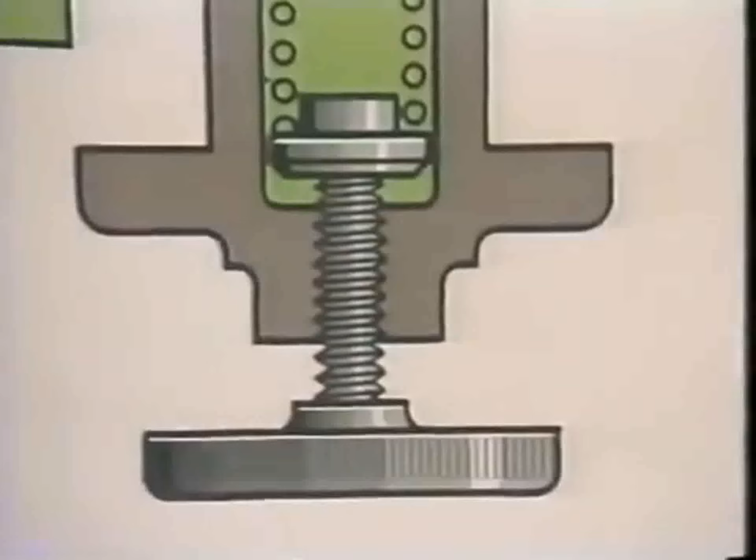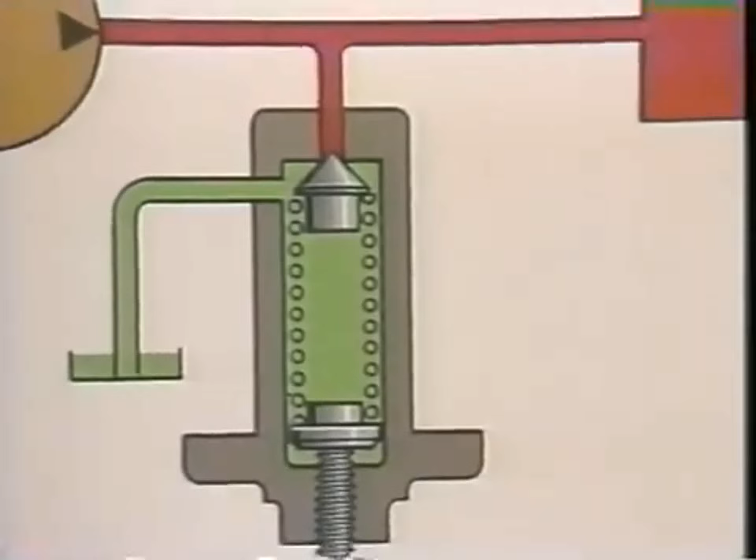Let's start with the relief valve. In its simplest form, it doesn't have to be any more than a ball or poppet held on its seat by a spring. Here we would just tighten up on the spring until it was easier to move the cylinder with its required load than it would be to push the poppet off its seat.

Oil, like all liquids, takes the course of least resistance. If the cylinder is overloaded or stalls, the increase in pressure overcomes the spring load on the poppet. The poppet is then lifted off its seat, permitting the pump delivery to go to tank at a safe level. Pretty simple, you say, and it is.

But let's take a look at that spring. If the area of the poppet seat was only 1/4 of a square inch and we wanted a pressure setting of 1,000 psi, our spring force would have to be 250 pounds. Force equals pressure times area. That means it could support 1/8 of a ton without compressing, and that would have to be a very stiff spring.

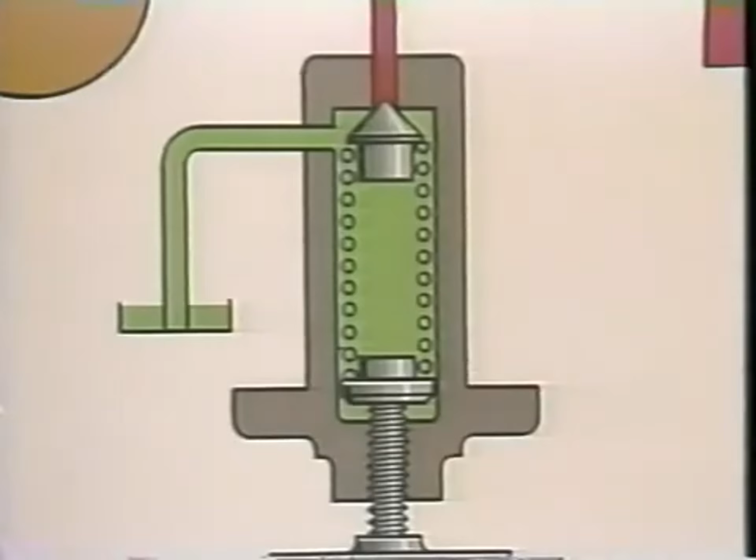Now, let's go back to our circuit and assume we have a 1,000 psi setting on the valve and a gradually increasing load on our cylinder. When the pressure reaches 1,000 psi, nothing happens because the hydraulic force on the poppet is exactly equal to the spring load. Any further increase, no matter how little, unseats the poppet and a very small quantity of oil begins to flow through. This is called the cracking pressure because the valve is not yet open enough to pass the full pump delivery.

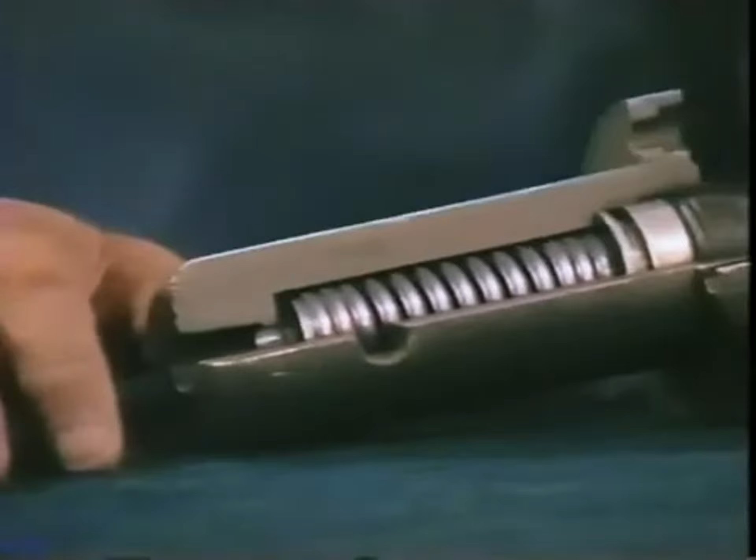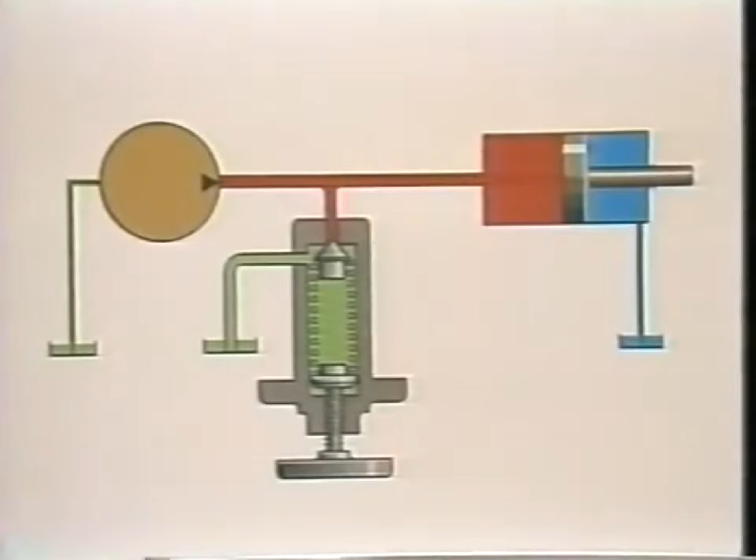The more oil we push through the valve, the wider our opening must become, and of course the more we must compress the heavy spring. And that, in turn, is going to take more pressure. Now, if our pump were a small one, say 1 or 2 gallons per minute, the increase in pressure would probably be negligible—15, maybe 25 psi. A 10-gallon pump at the same spring setting, however, might require an increase of 150 to 200 psi to pass its full delivery through the valve. This difference between the cracking pressure of a relief valve and the pressure at which it can pass the full pump delivery is called override.

A simple relief valve has too much override to be used in most of today's high-pressure circuits. One suggestion might be a larger valve, but then we'd have more area under pressure, and this would require an even heavier spring, so you can't gain that way.

Fortunately, there are better valves for handling large quantities of oil. They have a number of different names. We call ours a balanced piston relief valve for reasons that will become obvious if we look at an illustration.

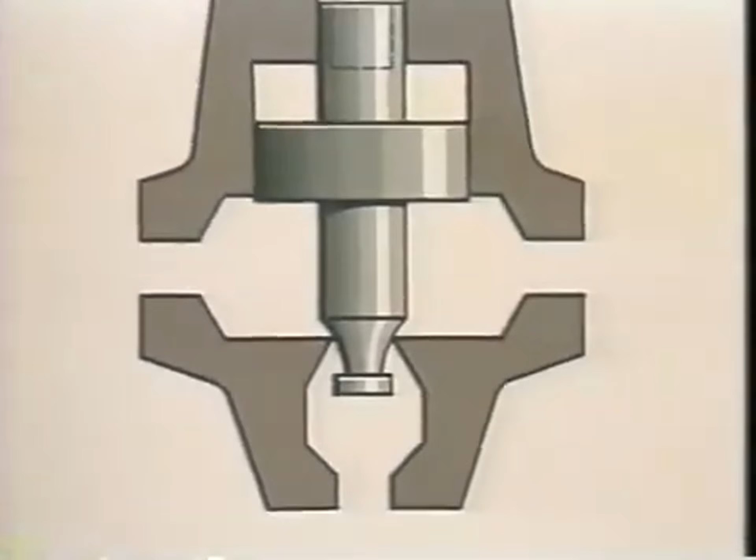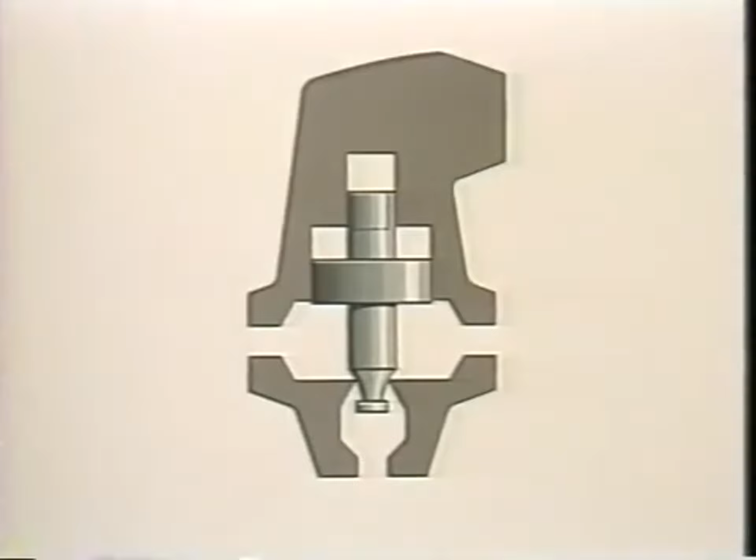We start with a piston which has equal areas on the top and bottom. It fits into a body which has a straight-through passage for convenience in piping and a port at the bottom which must be open to tank. If, for instance, our pump were on the left, oil would flow into the valve around the bottom of the piston and out the other side to the cylinder. Even a light load on the cylinder would cause sufficient pressure on the underside of the piston to lift it off its seat and permit all the oil to go to tank.

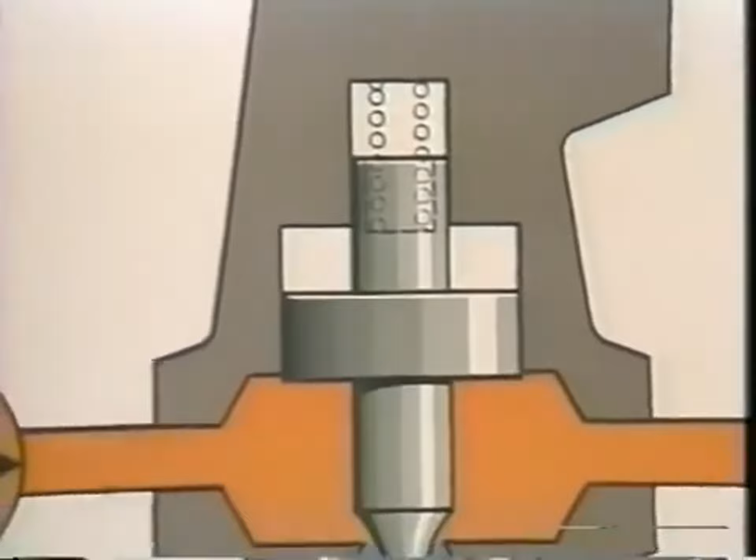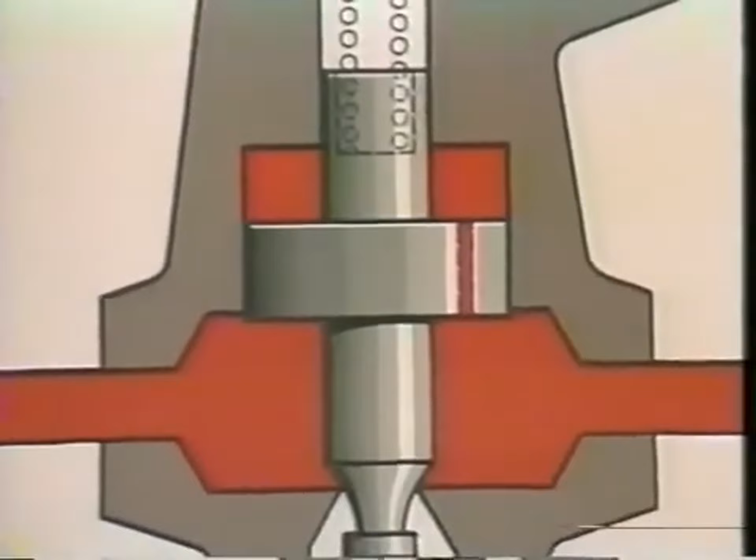To prevent that from happening, we install a spring on top of the piston, not a heavy one as we did before, but one so light that only 20 psi under the piston would cause it to lift. Next, we drill a small hole through the piston, connecting the area on top with the area on the bottom.

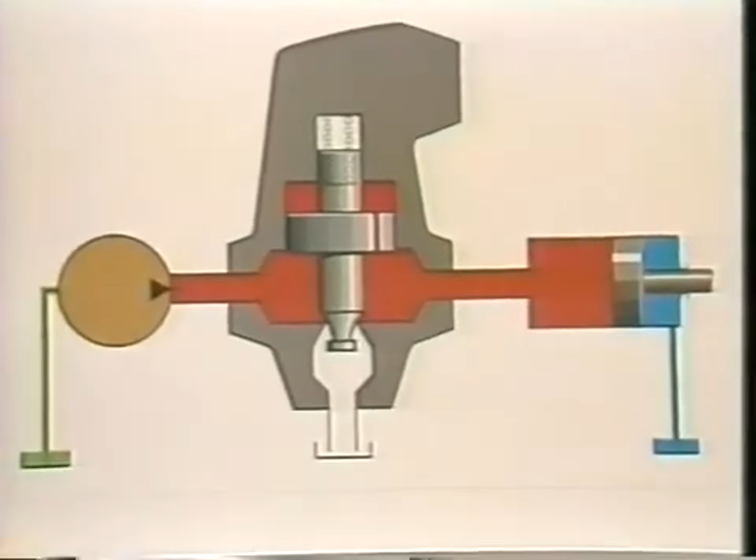Now, any pressure on the underside of the piston would force oil through the little hole into the top chamber until it was filled. Then, of course, the flow would stop.

Let's go back to one of our basic hydraulic principles. To have flow through an orifice, there must be a difference in pressure. If there's no flow, the pressures will equalize. Once our top chamber is filled, the flow stops, and the pressures top and bottom become the same. With equal pressures acting on equal areas, our piston is in hydraulic balance, and the light spring holds it closed.

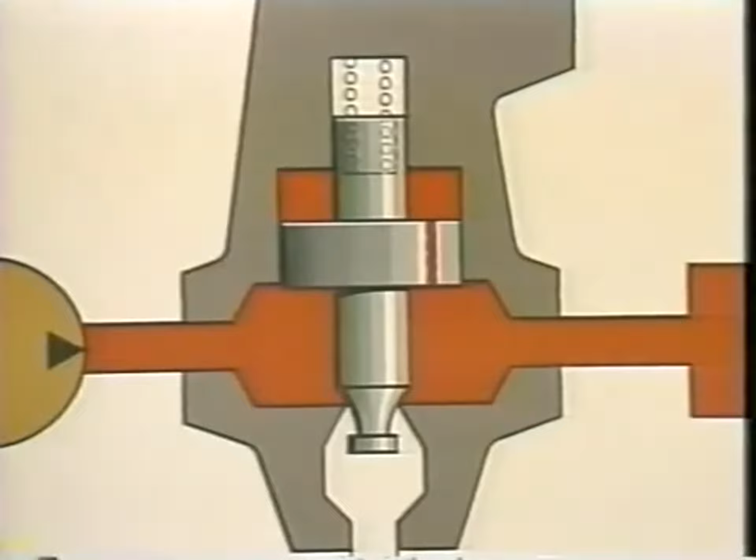What we've done is use a light spring and hydraulic pressure to hold the valve closed, instead of just a heavy spring. The rest is easy. All we have to do now is limit how high the pressure can go in the upper chamber.

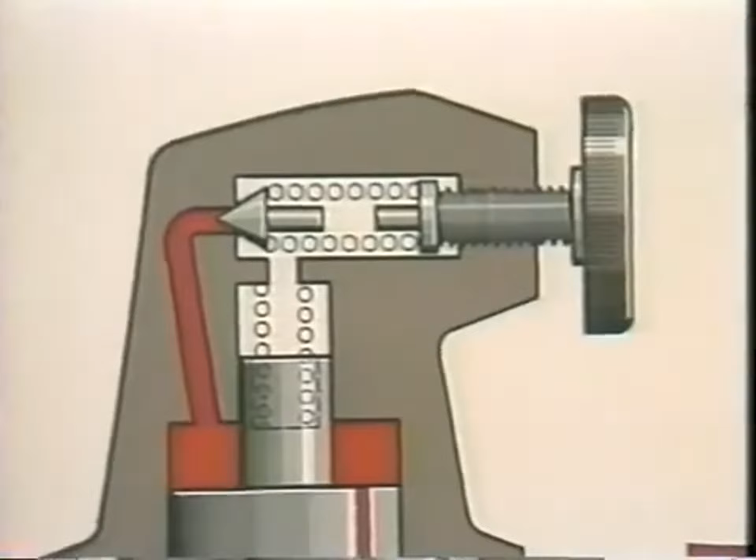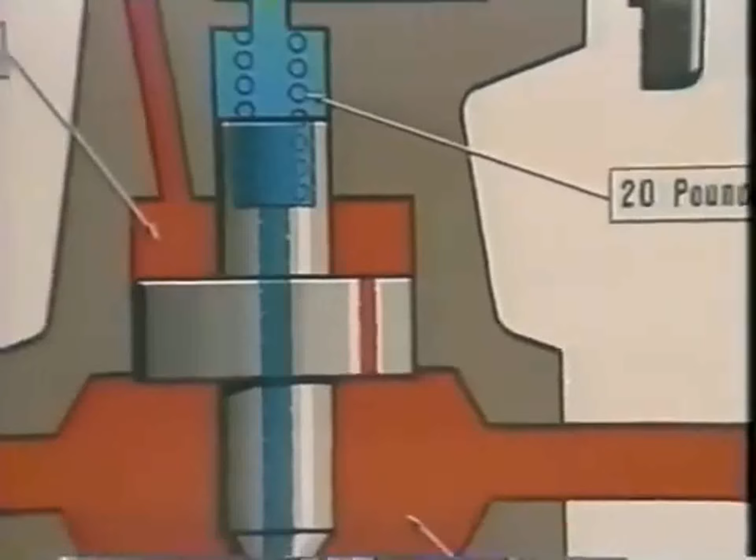To do that, we put a small poppet with an adjustable spring in the top cover and a passage connecting it to the chamber above the piston. If we set the poppet to open at 500 psi, the pressure above the balanced piston will be limited to 500 psi. With 500 psi and our light spring holding it closed, the most pressure we can get in the bottom will be 520 psi.

To increase or decrease the pressure setting, we merely adjust the spring in the cover. Actually, 3 springs are available, giving us maximum pressure settings of 1,000, 2,000, or 3,000 psi.

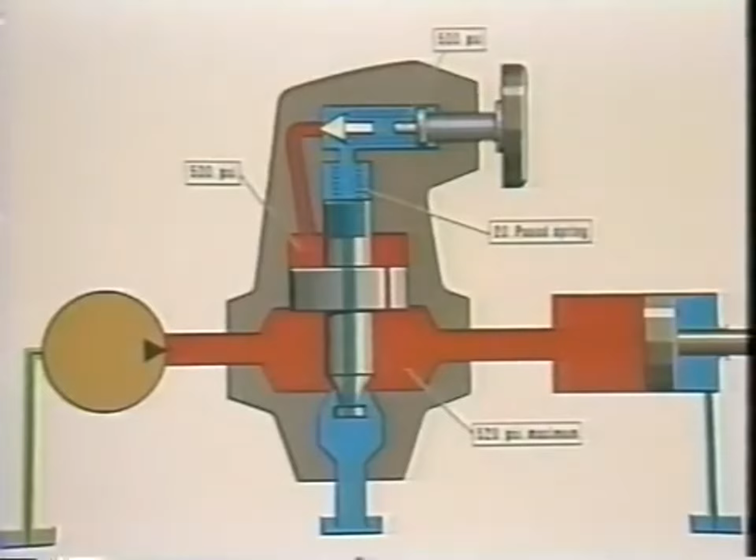You're probably thinking, that's a neat valve, and I can see how it works, but how does it overcome the override problem of the simple relief valve? Well, you're on the right track.

To explain, let's use a 1 gallon per minute pump and set our valve at 1,000 psi. As the load increases, pressure rises until it reaches the setting of the poppet and pushes it off its seat. The oil wants to flow through the poppet and back to tank, but it can't all get through the balance hole. So the pressure beneath the piston continues to rise.

When this pressure increases by 20 psi, it overcomes our light spring and lifts the piston off its seat. That 20 psi difference pushes about half a gallon per minute through the balance hole and over the control poppet in the top cover. The rest of the fluid lifts the large piston off its seat and flows out the tank port.

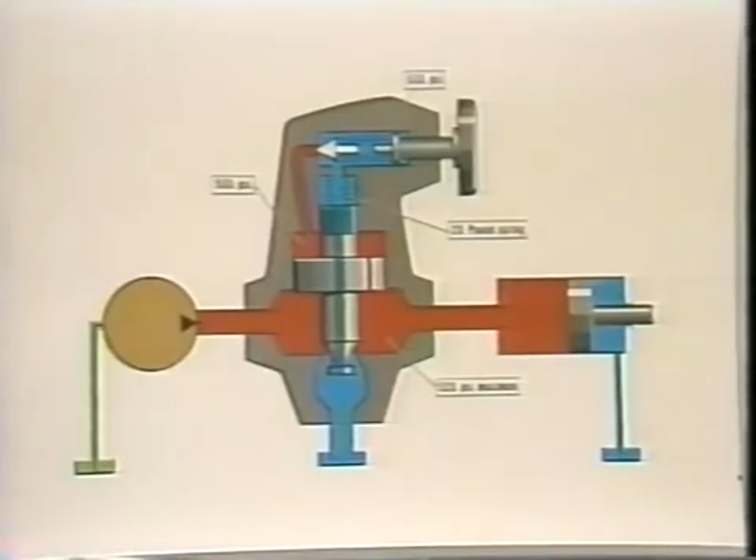Now, a larger pump flow needs a larger opening, and our balanced piston must move up farther. In this case, though, it's only compressing the light spring, so the override is considerably less than what is developed in a simple spring-loaded relief valve under the same conditions.

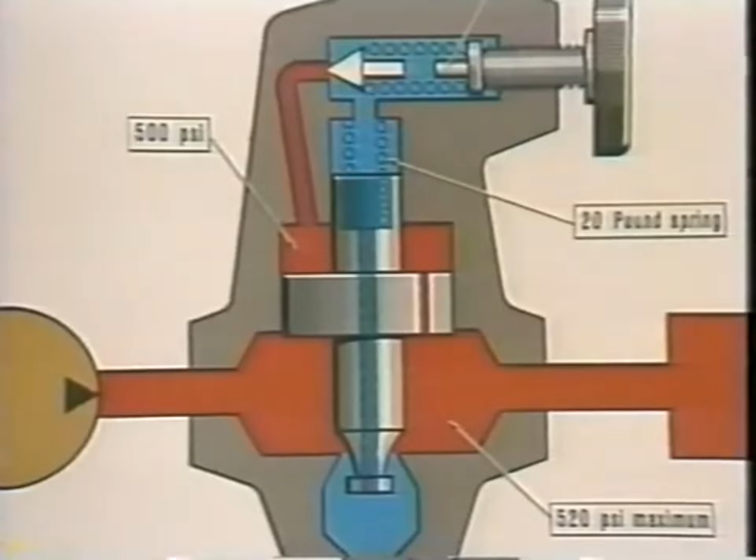Perhaps this would be a good time to compare the actual hardware. This valve has quarter-inch pipe ports and is rated at only 3 gallons per minute. Yet, look at the size of the spring it requires.

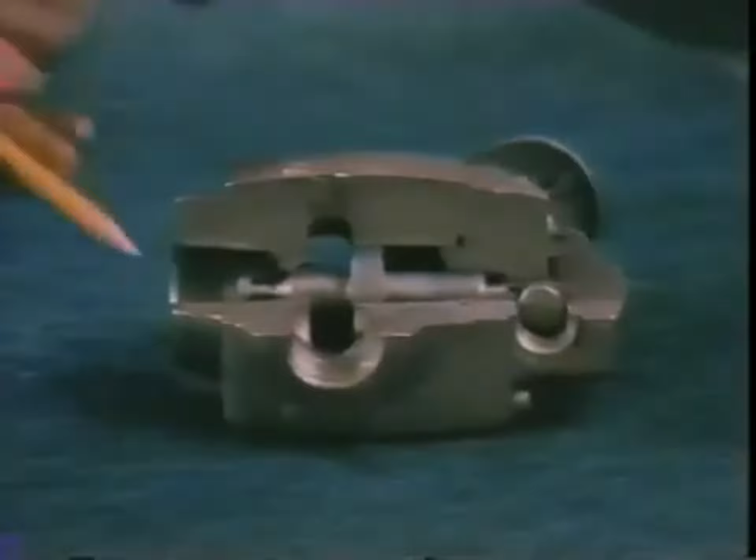Now, this one here is the balanced piston type. It has three-quarter-inch porting and is rated at 45 gallons per minute, and due to its balanced design, requires only this light spring. Some difference.

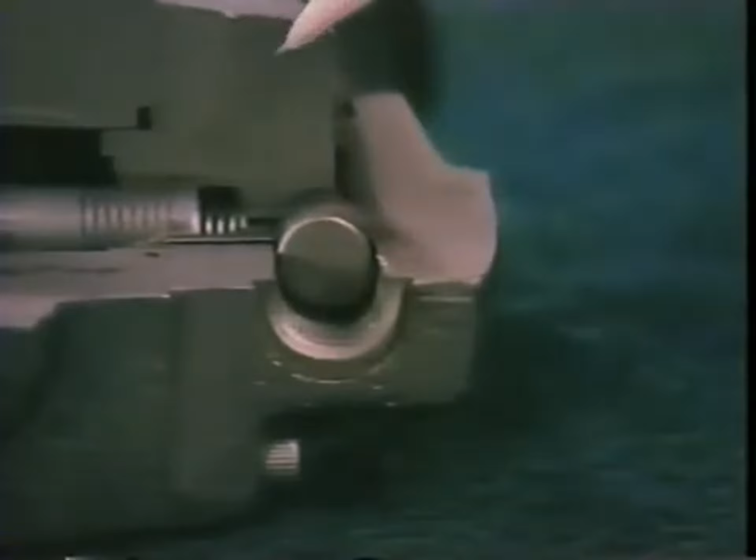This three-eighths-inch port in the cover enables us to remove and replace the seat for the control poppet. You must be sure to replace the plug when you're through. Leaving the plug out would be like opening the passage.

There wouldn't be a flood because all the oil that would come out is what 20 psi could push through the little balance hole. The point is, you wouldn't have any pressure above the balanced piston, and it would open, limiting pressure in the entire system to about 20 psi.

Now, no one would deliberately leave the plug out, but it is common practice to pipe a line from this port to a small off-on valve, which could be opened during periods of idleness. This is done to unload the system and save energy.

We call that venting the relief valve. Sometimes, too, instead of an on-off valve, a spring-loaded poppet, like the one in the cover, is used to permit adjusting the pressure from a remote position, such as an operator's console.

Remember, the maximum pressure adjustment in the cover can never be exceeded from the remote position. If it hasn't been stated in so many words, I think we can see that the primary function of a relief valve is to limit maximum system pressure, to control the force of the cylinder, or to control the torque of a hydraulic motor.

Occasionally, a valve may need an assist from another valve to get the job done. Let's assume we have a circuit with two clamp cylinders, one larger than the other. The larger clamp cylinder requires less pressure than the smaller. Here we have a pump, two cylinders, and a main system relief valve.

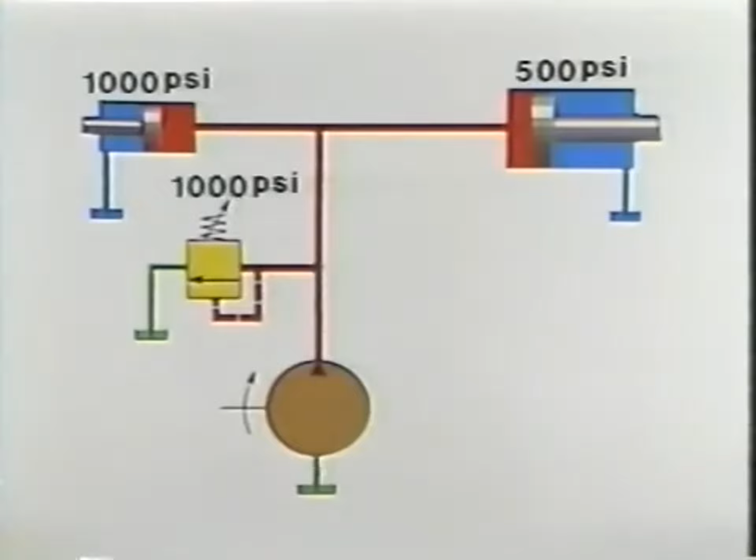Let's say our large clamp cylinder pressure must not exceed 500 psi, but a full 1000 psi is required by the small clamp. If we set the relief valve to limit the entire system to 1000 psi, that should take care of our small clamp, but it will be too high for the large clamp.

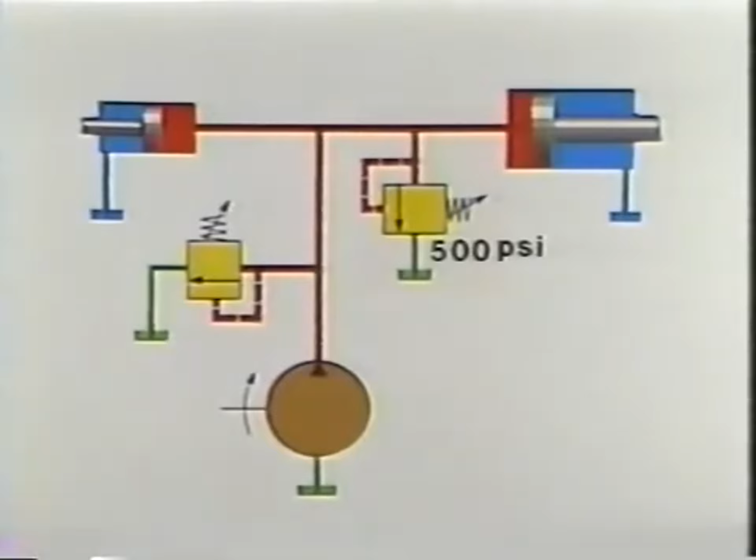Putting another relief valve set at 500 psi here would at first glance seem to solve that problem. But wait a minute—when this relief valve opens, it would limit the whole system to 500 psi. Remember, a relief valve is normally closed and opens when pressure reaches its setting.

What we need here is a valve that is normally open, but closes when its setting is reached. Oil can flow straight through from inlet to outlet and into our large clamp cylinder because the spring holds it open. This time, though, we will sense pressure at the outlet port and let it oppose the spring.

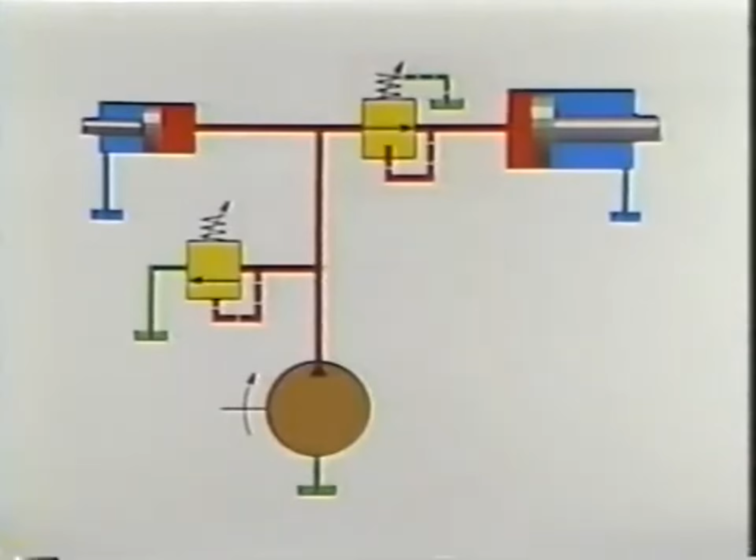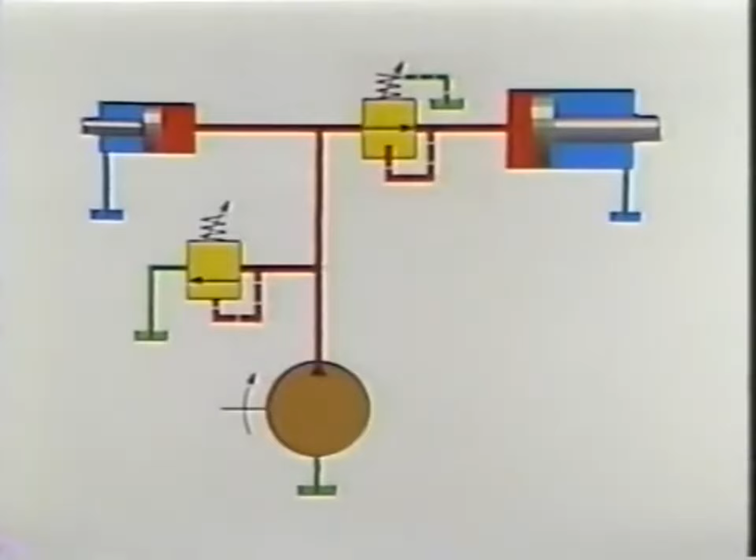Now, anytime pressure at the outlet tries to exceed the spring setting, the valve closes and limits the pressure in the cylinder. If the spring were set at 500 psi, the large clamp cylinder pressure could not exceed 500 psi. Pump flow would still be available to the small clamp right up to the main system relief valve setting of 1000 psi. You've probably already guessed this valve is called a pressure-reducing valve, because regardless of how high the system pressure may be, it reduces the pressure in its portion of the circuit to its adjusted setting.

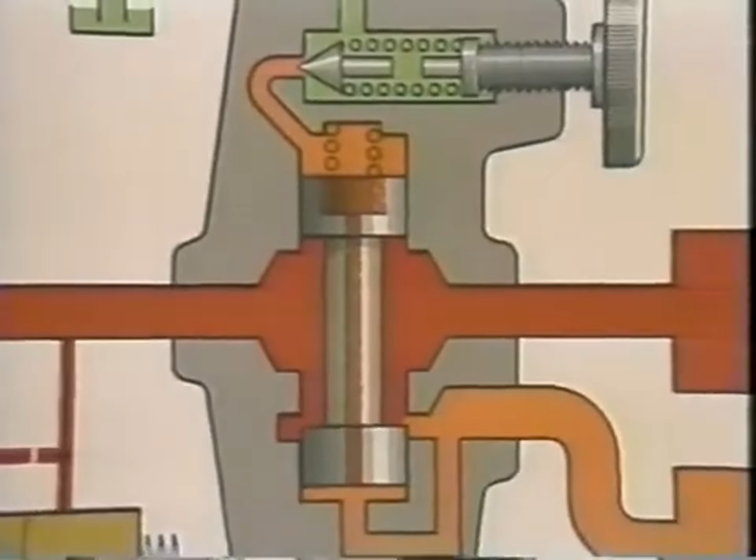A more realistic view of a pressure-reducing valve would look like this. A sliding spool fits into a body that has a straight-through port which never closes. High-pressure fluid can enter or leave through either side. A relatively light spring holds the spool down and open to permit oil to flow freely through the bottom or low-pressure port. Pressure from the low-pressure side is sensed under the spool to oppose the spring.

However, like the relief valve, our spool has a balance hole from top to bottom, so pressures above and below the spool are equal. Here, too, a small poppet and adjustable spring in the top cover limit pressure above the valve spool. When the pressure under the spool exceeds the adjusted setting, plus the light spring force on top, the spool moves up, tending to shut off the low-pressure port.

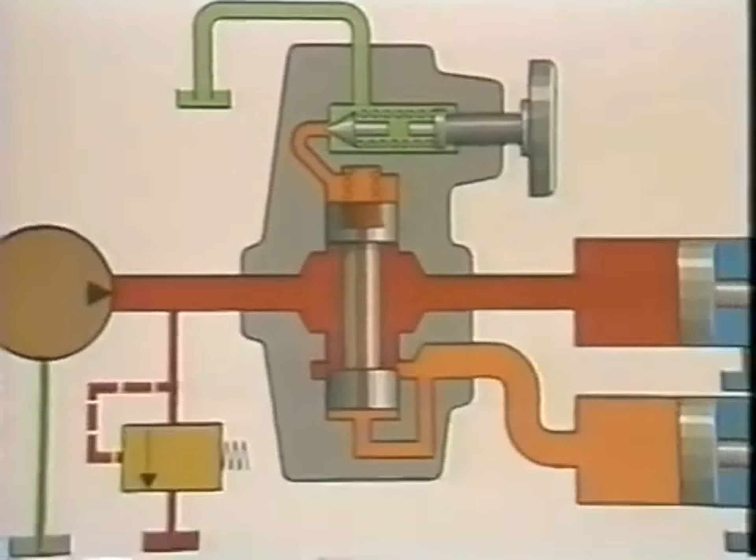Actually, whenever the valve is under control, there is a small quantity of oil flowing up through the balance hole and over the small poppet. Since there is no tank port on a pressure-reducing valve, this so-called control oil must be drained to tank through a small port in the top cover.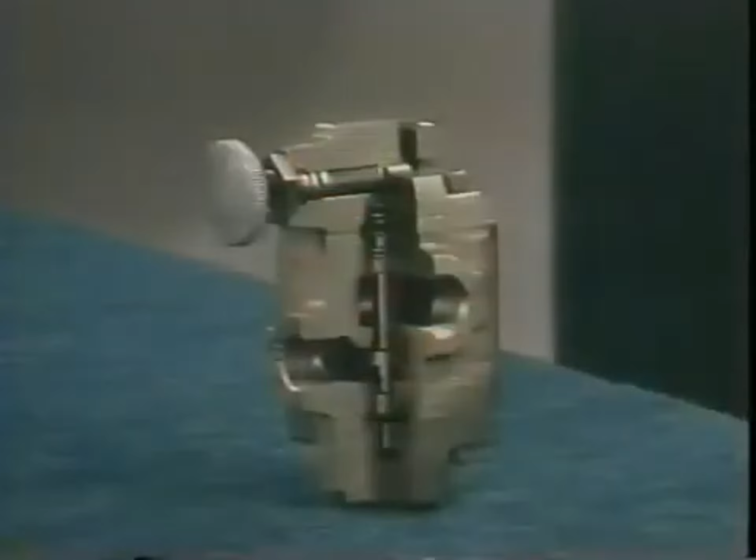Here we have a pressure-reducing valve cut away, so we can see the sliding spool and the light spring which holds it open. The sensing passages we discussed are actually small holes drilled into the spool, one of which lets oil flow into the top cover where pressure is limited by this small poppet and spring. This hump on the back contains a check valve to permit reverse flow, if, for instance, we wanted to retract our cylinder. Okay, now for a quick review.

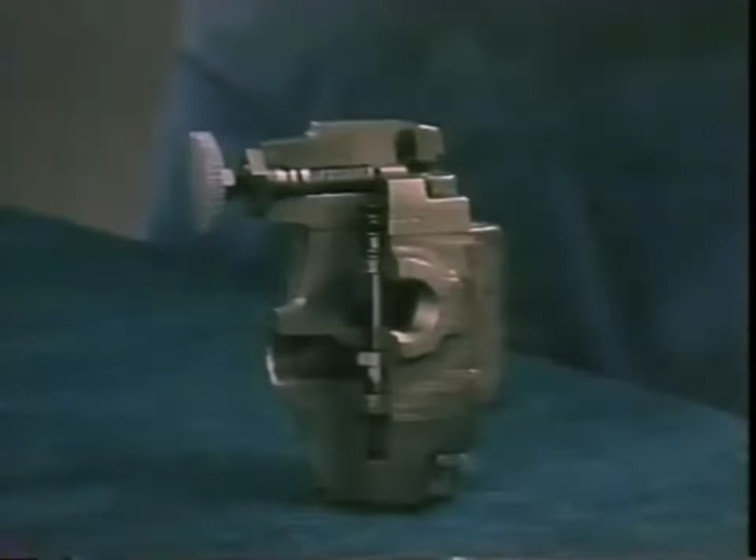The functions of a relief valve and a pressure-reducing valve are similar, but there are some important differences. The relief valve is normally closed and opens up to limit the maximum pressure in the entire system, and it's drained internally. The reducing valve is normally open, and it closes to limit pressure in the branch circuit. It may contain a check valve for reverse flow, and it must be drained externally.

Well, this wraps up Chapter 4 in our 8-part series on basic hydraulic principles. With the information put forth in this presentation, coupled with your own practical experience, you now have a strong fundamental understanding of relief and pressure-reducing valves.